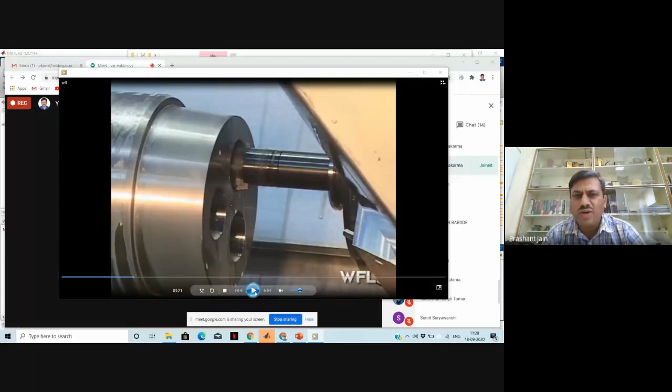Here I want to highlight this, you can see on this screen. This is the off-center drilling that has been done on the lathe machine. We all know about conventional lathe machines, we can do center drilling by mounting a drill tool on the tail stock. Sir, look at this, this is off-center drilling.

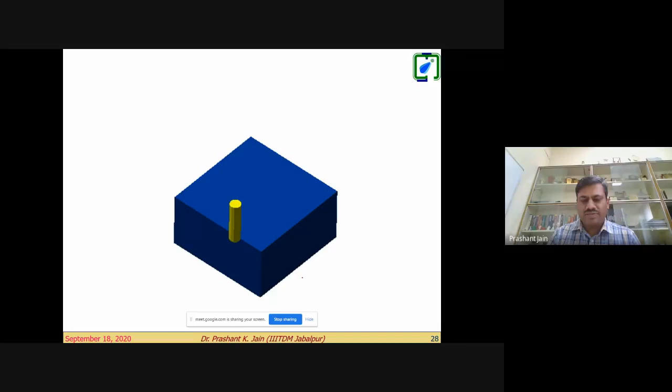What is required for us in this case is that every time we need a simulation to be run, the part programming to be done. Then look at this view. This all kind of machining requires computations. I am showing only this video, not going into much detail, because you require a lot of intersection calculations with different surfaces and different tools, and only then can you find out this kind of tool path.

Normally, what we use here for geometric modeling is UG, Unigraphics, CATIA, etc. And for machining we also have ProE, SprutCAM, Delcam, FeatureCAM, MasterCAM softwares available, which show us this simulation, and along with this simulation we can generate the G&M code program which we can directly run on our CNC machines. So look at this, how important this is.

This is 5-axis machining. Every time, what is required is that your CNC machine tool should be perpendicular to the surface which it is approaching. See it again.

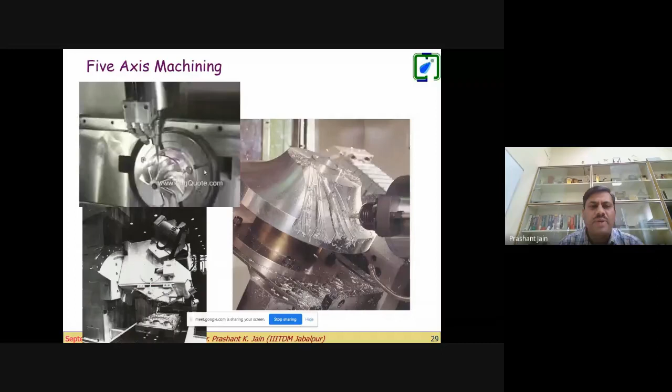See here, this is a turbine blade fabrication going on. What is required here is that the tool should make a perpendicular angle at this point every time. That's the requirement.

Now look at this. These are the rotary tables we are now using on CNC machines. So anytime we can make our machine into a 5-axis CNC machine, or we can keep our CNC machine 3-axis, with 2 additional axes given on this rotary table.

Now, if your software is not capable of synchronizing movement of these 5 axes, you need to do separate programming for these 2 axes and the remaining 3 axes with your existing CNC machine.

Look at this. One axis of rotation is here, and another axis of rotation is along this table. Look at this diagram: this table can be rotated about this center axis, and at the same time it can be rotated about this other axis. So 2 axes are made rotational. This is mounted on the horizontal machining center, so now we can have 5 axes.

Look at this again, another view. This is the Z axis, and you have the X axis movement in this direction. I hope participants have a little bit of knowledge about where the X axis lies, where the Y axis lies, and what principle we use to designate these axes, X axis, Y axis. If you want to share your views, keep typing in the chat box.

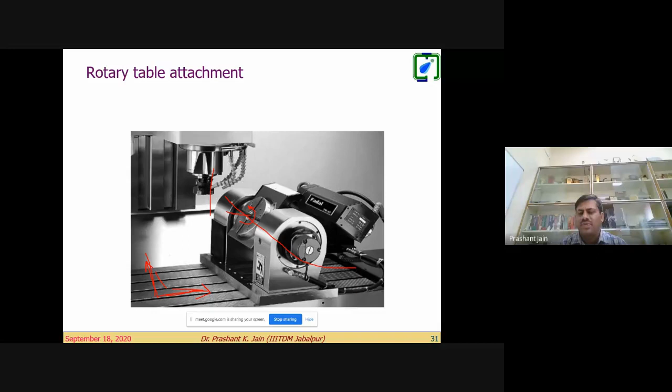Look at this, the huge NC system for large parts. Can anybody locate an operator in this picture? Drop me a message in the chat box.

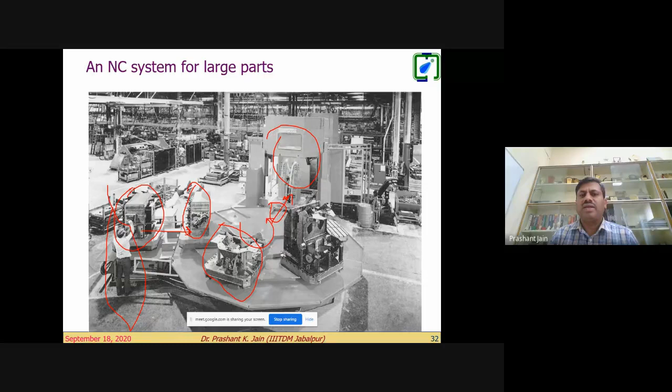You look at this, a lot of this setup is done separately on this separate pallet. Once it is done, it will be pushed onto this table. So this is known as the pallet changer in today's CNC environment.

We used to do this. Now look at this, what is the requirement over here? Can you notice that if we machine this cylindrical surface, with this machining center, every time your CNC machining tool is coming from the vertical, this is a 3-axis machining.

With this 3-axis machining, every time it will move like this in this direction, and then coming back, what will happen? It will formulate stair steps kind of thing. Everywhere you will have stair steps.

But suppose you want to have a smooth surface, what is required? Every time your tool should come normal to the surface. Look at this, in the second diagram, every time the normal has been calculated, so we can have X, Y, Z values for any point. And then, after the XYZ values, we can also have the rotation angles alpha and beta about the x-axis and y-axis.

That's why we need to calculate the surface normal. Can anybody comment on that? How to calculate normal to a surface? Any surface is given to you, how do you calculate a normal?

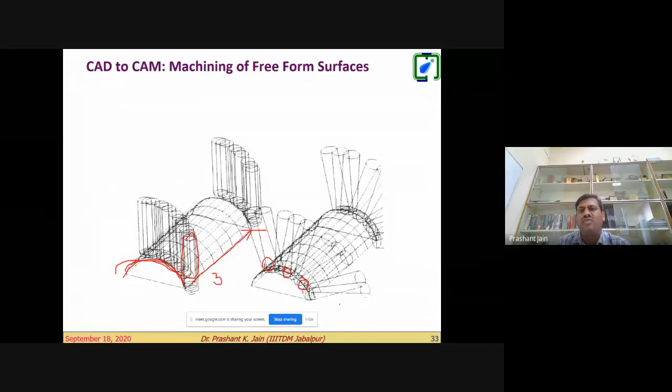So let us move to the part program. If you haven't done this, look at how our first part program will look like. Here's the question: a 2 by 2 inch square is to be milled, the diameter of the end mill cutter is 1/2 inch. Now we set this as a data point, 6 6. We know this would be 8 in the x-axis, and here it would be 8 by 8.

Okay, so look at this, how we write the program. We make this lower left corner as 6 6, and use the tool radius compensation. So our tool path would be like this. And if it is 6, we know what it should be, it should be 5.5. How do I conclude it should be 5.5? Right, I have shifted this tool path by the radius of the end mill cutter, 1/2 inch radius. So I have moved it away.

Now look at this, how we keep on writing. In the CNC machines, here the computational intelligence comes in. We can already apply the compensation, so all the movements will automatically be shifted like that.

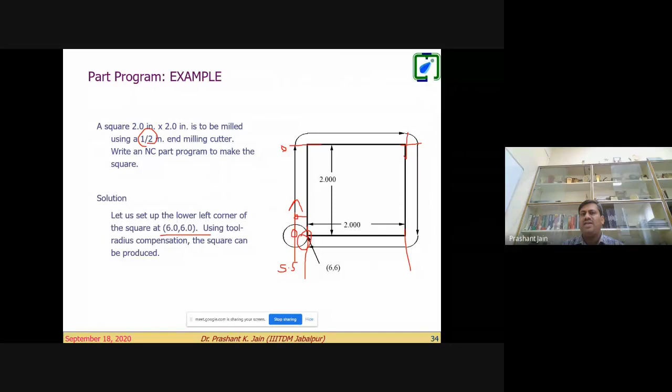And X will remain the same, so we have X8. Then you come to X8, then Y6, then Y6. So it will complete the cycle. Based on this, our part program would be completed in this manner.

Now see another part program. So what we have in the part program is step-by-step instructions in the form of numbers, letters, symbols. And when we group them into complete logical information, we call it a program. Now the CNC controller will interpret this program, then issue a series of commands to stepper motors, servo motors, or whatever other controls are there.

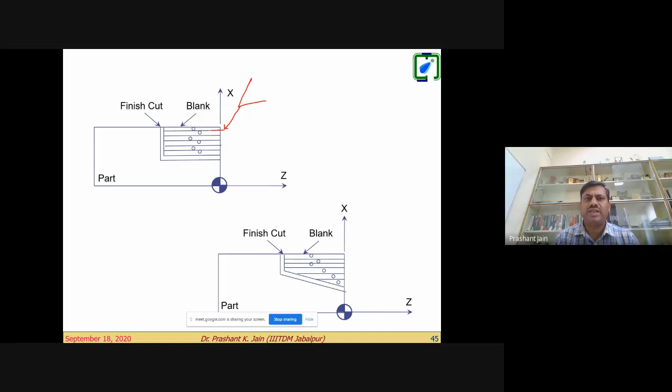Now look at this. If we have to do this kind of cutting operation, what is required? Every time your tool would be situated here, then every time your tool has to reach up to this point, then you start machining and coming back and going back. Then you go downward, then go again, take a cut like this.

So every time we need to perform this calculation by our manual calculator or whatever the best solution you can find.

Now look at this. If it is a taper cut, what is required? We may not be knowing this length, right? Similarly, here we may not be knowing this length. So either you use trigonometry based on the tapered angle to find the length, or you can use equations where you know this is a straight line, and this is another straight line parallel to the z-axis. So you can find out this intersection point, right?

So every time you find this intersection point, then take the tool back to some height and go back at the retract height, right? And then go back outside the billet and go downward like this. So if you have this kind of taper cut, you can plot several straight lines and find their intersection points like this. So your tool has to move up to this point, right?

And then, suppose I ask you to develop a CNC program and this drawing is given to you. For this drawing, what is required? You need to plan how the machining is going to take place, right?

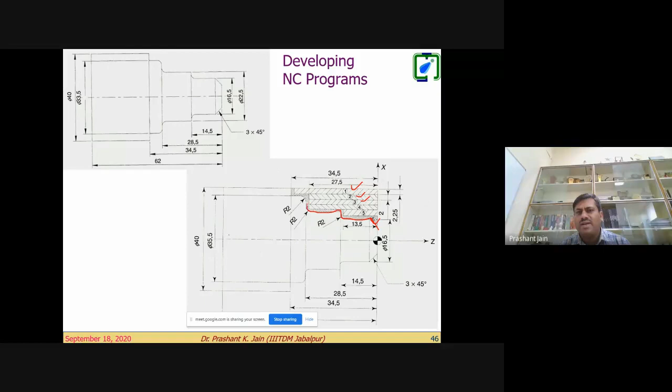So look at this. This is the first cut, second cut, third cut, fourth, fifth, and then sixth cut in a single pass, right? So this is the planning to be done for developing any CNC part program.

For any CNC part program, look at this, how we calculate. See another example, look at this, this is the first cut. So you are starting from here, then going up to this. What is the requirement? You require the coordinates of all these 4 points, which are now to be amalgamated with the G&M code to make a complete part program, right?

So for this kind of planning, you need to find the coordinates for first, second, third, fourth, fifth - all the coordinates. Now look at this, for a complete operation you need this kind of calculation. So here with circular interpolation, linear interpolation means G01, G02 and G03, depending on clockwise and anti-clockwise circular interpolation, you have to find it out. So this calculation has to be done.

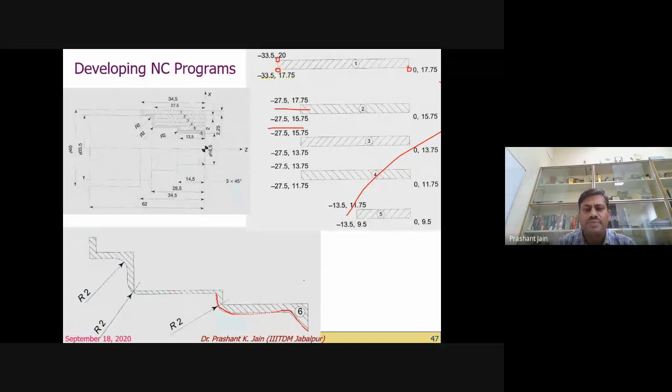Now look at this, some more typical situations where you need to calculate something more. Look at this, what is happening here? You see, this is a SolidWorks drawing, so the inside blue color part has to be cut. So what is required? Your tool has to move every time from this. Cutter diameter is given as 0.5 inch, right?

So what is required? You see the coordinate of this point is given as x4, y4, z0. Now we want P1, so the x of P1. So x of P1 would be like this - this is what we have already talked about. 4 is the coordinate already known to you, and now you are shifting to the left side, so the radius of the cutter, 0.25, has to be shifted. So you have got 3.75.

Now for y, can anybody comment how I can find it, the y of it? Anyone would like to say? You can unmute when I ask you to comment, or you can quickly drop your comment on the chat box. Anybody can find out how we can calculate the y of it. We can use geometric calculations, we can solve the equations, we can also use trigonometry.

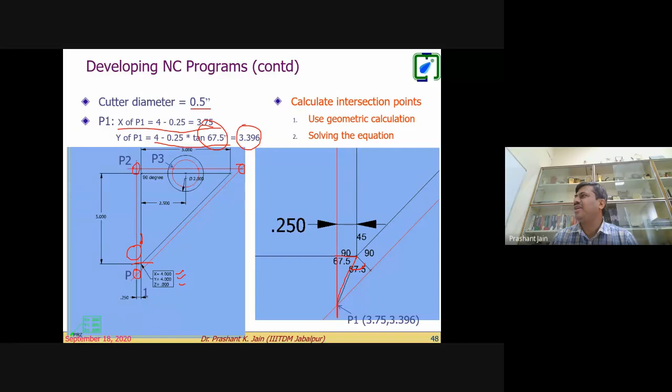No answers? Okay fine. Look at this, how we calculate this circle. This is the center of the circle for this blue color geometry. But for making this semicircle from here to here, your tool will be moving from this point up to this point, which would be the center. So you need to calculate these two intersection points again, then accordingly this tool will move up to this point. So that has to be taken care of again.

Look at this, once we calculate all these things, what is going to happen? Here you see, if you can also check in SolidWorks this kind of situation, you can click on it and get all these coordinates directly from SolidWorks.

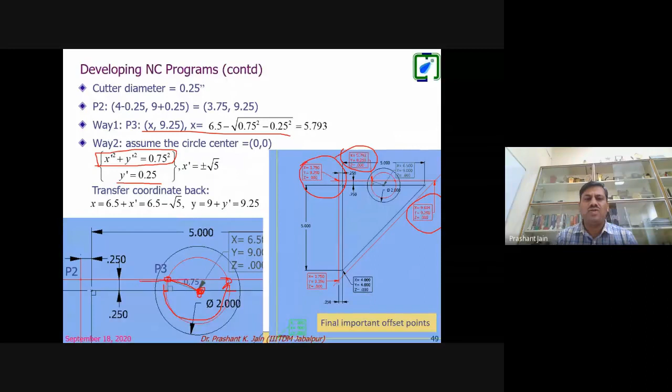If there is a circle, you want this circle equation to set the intersection. So this is the well-known circle equation. You assume this is 0,0 for movement, so the radius would be 0.75 at y equals 0. And this line, straight line y, is at 0.25. If this is 0,0, then this line is at 0.25. By intersection of this, you can find x plus minus and y plus minus.

So based on this, here is one x value, here another x, and similarly you will get two y values. These x,y values are with respect to this point assumed as 0,0. Then accordingly, you can find out and shift these values when this is your actual 0,0, in terms of this point.

Now look at this, after calculation of the center, we can write our part program. So we can start with N10, 20, 30, 40, 50 like that, and continue with this program. We can mention all the coordinates. Remember, this is P1, like this. All these coordinate values are to be completed. So this is going to happen with our part program.

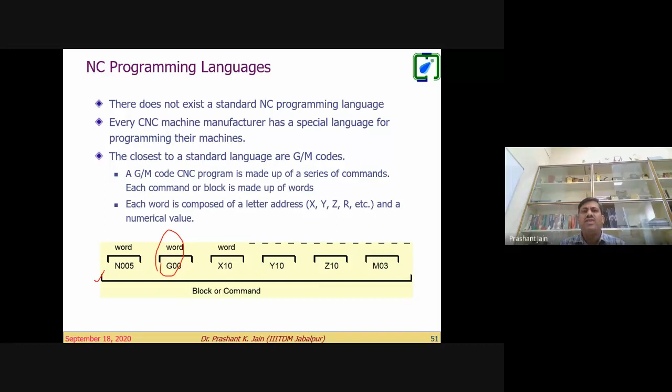My purpose of discussing all these things is to emphasize the computations required for your part program. So you should think about how we can calculate and convert this into the part program. When we start writing the part program, we start with G and M codes. We call it a block - these are the NC words, and this one block makes complete useful information for the CNC machine, which the CNC machine can execute. So these are the various G and M codes.

Coming back to the linear interpolation, you look at this: we give the end point and the start point. So this is for the linear interpolation, and accordingly you see this part program has been written - G71, G97, G94, so millimeter mode, constant RPM, feed in millimeter per minute, then go to home position, tool change, spindle RPM, coolant on, then rapid traverse to this position, X42 somewhere here, so your tool will come from this point to this point.

Okay, then look at this. Then X39, you are ready for the first cut. Now you have given the command G01 and now it will take your first cut. Then G00 Z1 going back, then again right. So it will come up to this point, going back and then go back.

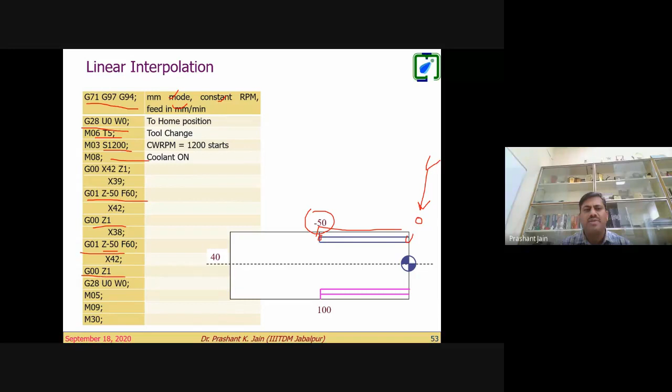So when you mention here Z minus 50, this is the Z minus 50 value. This is how we write the program, and once it is completed, we ask the tool to go back to the home position. Then write spindle off, coolant off, program stop and rewind. So this is the first program with the linear interpolation. Similarly, we can go for the circular interpolation.

Now, what is happening here? Suppose in this case, let us see. What has happened? We have taken one cut, two cuts. Assuming that this is an aluminum material, I could have taken a 2 millimeter cut, right? But suppose instead I have been given MS, so instead of 2 millimeter, I may require 0.2 millimeter. But suppose SS is given, then again the depth of cut would be more or less. Then suppose I am working on tungsten or some other material or titanium, then the depth of cut may be very, very less. What will happen?

For one cut, I need to write a block of 4 lines. For one complete cut, I need a block of 4 lines. So my tool will go down, take a cut, and then come back, and then reach back to position. So I need to write 4 lines of a G and M code program for one cut. When it was 2 millimeter, it was quite simple. I have written it, right?

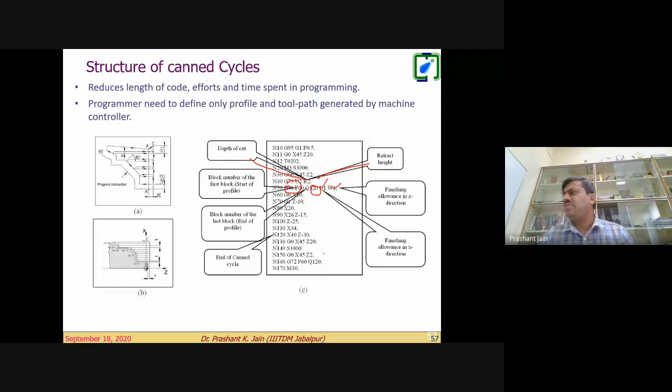Look at this a little bit with more clarity. We can assign here the depth of cut. I will again talk on the structure again. So we can say depth of cut, we can say the retract height, we can say the starting block number, we can say the end block number. We can say the finishing allowance in X direction, finishing allowance in Z direction. Then we can have the end of canned cycle. We can also define the finishing cycle. So based on this, we define the canned cycle.

Now look at this, how the canned cycle will work. There are different canned cycles. Mostly we commonly use 3, particularly for turning. I'm not talking about drilling. N number of canned cycles are available, and those canned cycles vary from machine to machine. Now look at this.

You see these red points, right? Red points to be added, and blue color dot is the intersection point. So based on this, you see the first cut is done. Second cut, tool back. Third cut, this is third cut. Now tool back. Fourth cut, now tool back. Fifth cut, now tool back, like this.

Now look at this, what is going to happen in this situation, because tool is back from here. There would be a steps kind of thing. This is going to happen, right? So here there would be steps. So in final cut, it will go like that, the profile. So these steps would be removed.

Now you see again, there is a gap. What is this? This material is left for the finishing part. So once this is done, you see final cut will take place so that it can finish, right?

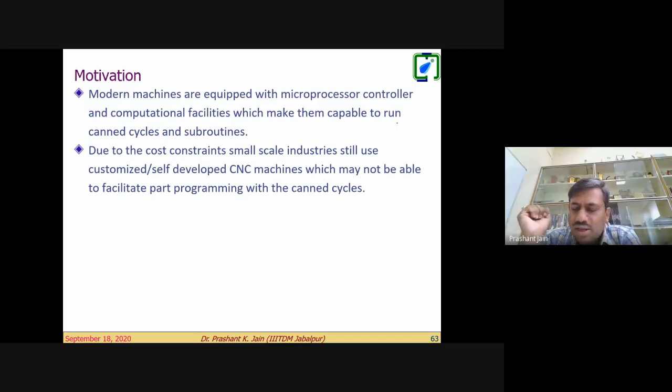So here I would like to specify that when I talked about the simplified program, I mean that you have the program with only linear interpolation, right? And the canned cycle program will define your geometry, your profile of the machining surface, and the length of the program will be very, very less, right? But your machine should be capable to calculate those profiles, right?

So canned cycle facility would be available, right? What I am presenting here, for a low cost machine, we don't have this facility, right? So what we did here, we made a utility, right? Which software utility will convert this canned cycle part program into a simplified part program and remove the canned cycle.

So when I write a part program for a CNC machine which does not have the canned cycle facility, right? So I will write a program for a high-end machine. My program length may be 10-20 lines, and I will run it on my software utility, which will convert this program into a simplified program, which may have more than 1,000 lines or 2,000 lines, right? So that is the thing we developed in this.

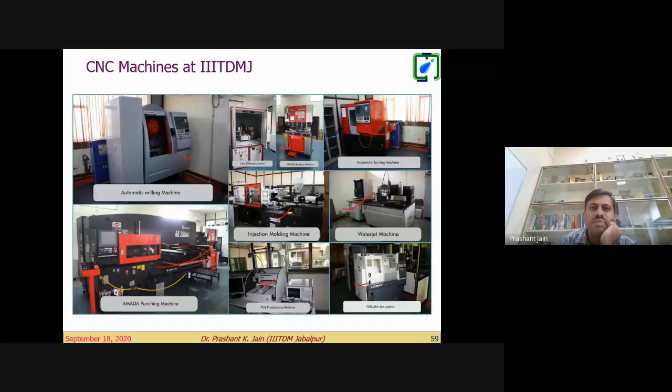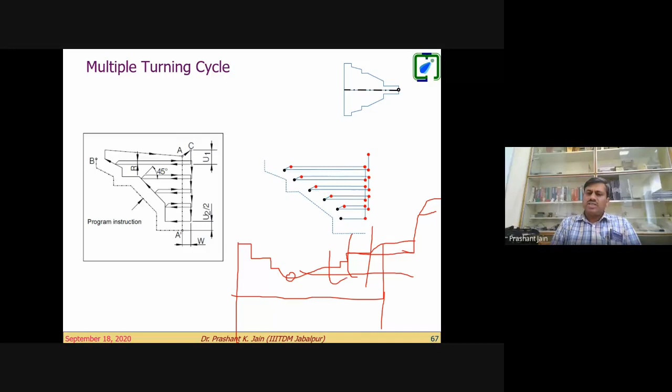Even if I take from the facing to reach up to this point, what will happen? This will remove this portion. So in this situation, we will have a pattern repeating cycle where the tool is always moving parallel to the geometry of the workpiece.

Look at this, this is the geometry. So the tool will move like this. First cut, look at this, second cut, third cut. So in this way, the machining would take place, but it is time consuming because every time it has to trace the profile.

And even in the first cut, what is going to happen? The material would be like this. Look at this, in the first cut, this much material is only removed, the remaining portion is idle. Second time, this much portion is removed, the tool will idle. So there are advantages and disadvantages of all three canned cycles, but they are defined for the convenience of the user.

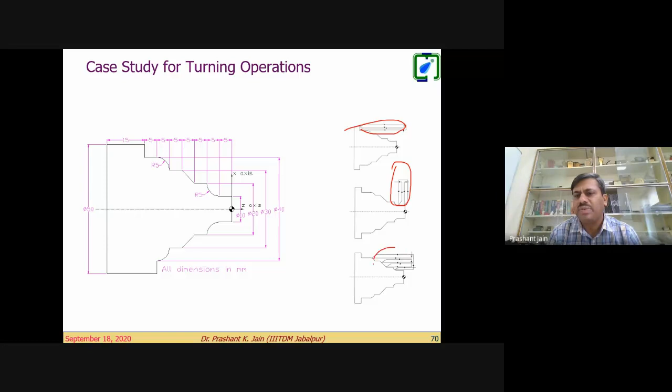Now look at this, what we have done in this case. Suppose this workpiece is to be machined. So we have taken here the turning cycle, we have taken here the facing cycle, we have taken here the multiple turning cycle. Look at this.

These are the two machines. You see, this is the Concept Turn 250 EMCO machine. What is happening? This machine can run the canned cycle, so I can write a very simple program. This is an Envirotech made very small CNC machine. This machine does not have the capability to have the canned cycle.

Look at this. When I wrote a program for this machine, the lines are total 31 lines of the program. This program I loaded to my software utility and converted this into the simplified part program, meaning without the canned cycle. So I have deleted some lines in between. You see the lines are 140, and this is the simulation on the EMCO machine. Envirotech machine does not have any facility for simulation.

So I hope you got what is the advantage into that. I wrote a program of 31 lines, which is automatically converted by the developed utility to 140 lines, and which can be run on different machines. Now look at this next.

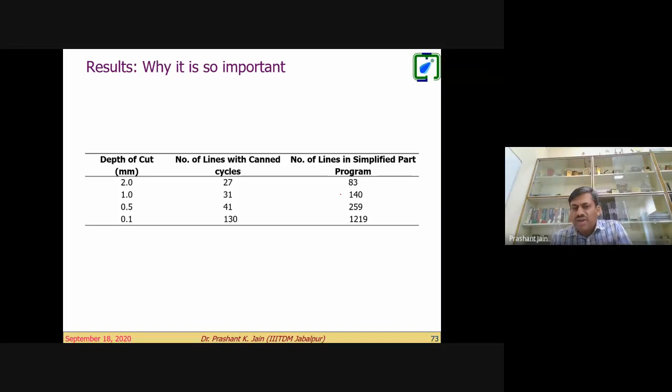But when it is converted into the simplified program, the total number of lines are 1200. See the advantage. As a user, I would be writing only 130 lines, and this machine would be able to perform the canned cycle just like this machine. The huge difference in cost of both the machines, that's the advantage we get in this process.

Then let me show you another case study. Before that, let me run a video. Let me try so that you can understand in a better way. Let me see which movie I have tried. Yeah, just look at this video.

Can you see the video? Yeah, can you see that? Yes, sir, we can see the video.

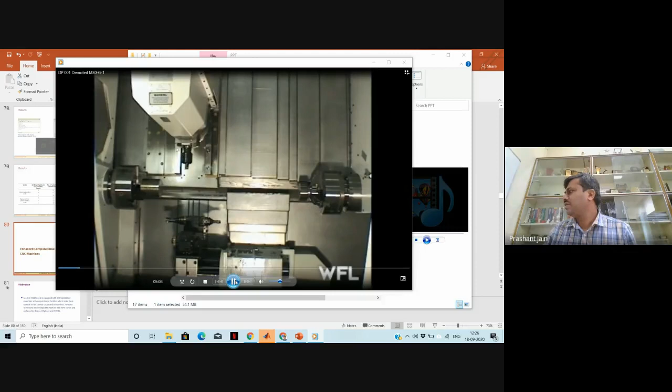Let me run from another window as well, from another system. I hope we will try to show you the sound. Can you listen to the sound as well?

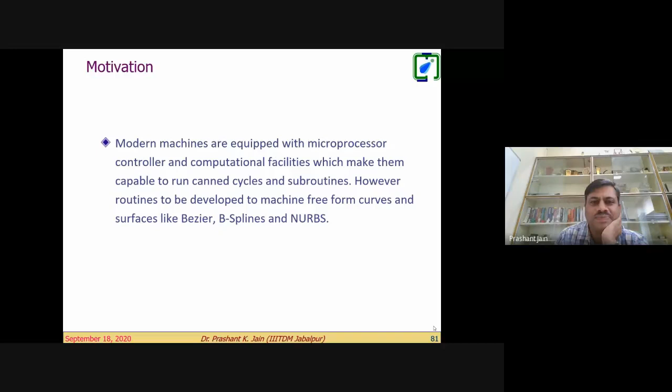So now let us talk about the Bezier surface, right? In this case, what has happened? Even whatever machines we are discussing or video we have seen so far, they are also not capable of running the canned cycle for these kinds of things, right?

Somebody mentioned in the chat box about contour machining, right? So in contour machining as well, what is required? We normally convert all the contours into small linear segments, right? If you talk about the CNC machine, they have linear interpolation and circular interpolation. If you want to have an ellipse, parabola, or hyperbola, they don't have any facility directly.

What actually they do: you can take an ellipse, hyperbola, or in this case Bezier curves, B-spline curves, non-uniform rational B-splines. They get cut into small portions of small linear segments.

Okay, so like this, suppose this is a Bezier curve. I'm not going into details of the Bezier curve - you can Google it, or some other time if we find an opportunity we will certainly discuss. This is a synthetic curve, need not go through all the data points, and it's a very intuitive curve, right? So it has a lot of properties.

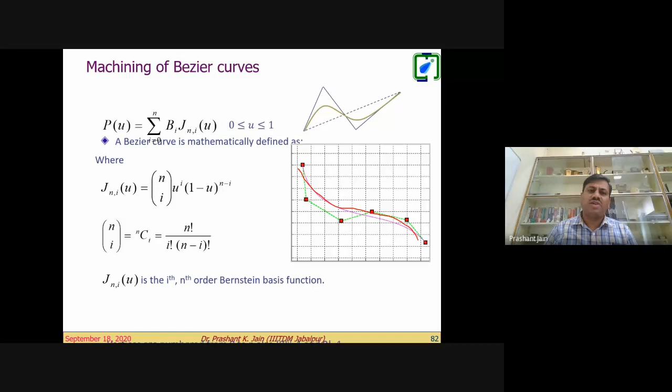And suppose this type of curve or surface is to be generated at CNC machines, a lot of calculations are involved, right? I'm not going into the details of the calculation.

Only thing: suppose this is the curve, and for the turning cycle I have these horizontal lines. For the facing cycle, we have the vertical lines. We can calculate these intersections, right? Once we calculate these intersections, we can convert this into the part code, right?

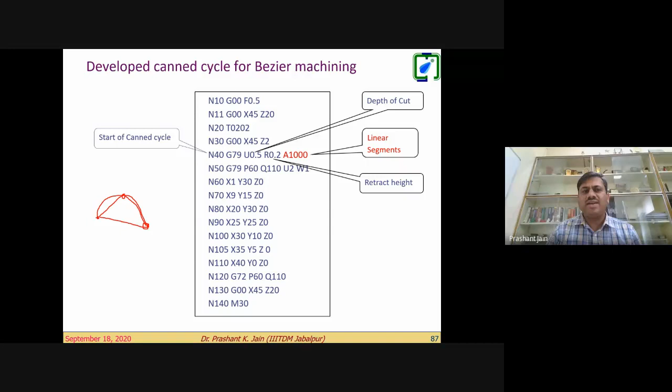So what does it mean? Suppose I have this Bezier curve, right? And if I say 1, it means my CNC machine will start to move from here. When I say 2, then the machine will go to this point and then come back, right? When I say 4, then the machine will go like this, right?

So for this calculation, when I say 10 segments, that's a coarse division. When I take 1000, it will be more close to the actual curve. So depending on the requirement, we are capable to do this, right?

Then you have the block number, the start of the geometry, end of the geometry, then finishing allowance in both directions. Then you have the end canned cycle and also the finishing cycle. So the remaining part is the same like a canned cycle. Only thing, this canned cycle will calculate the points for the Bezier surface machining, right?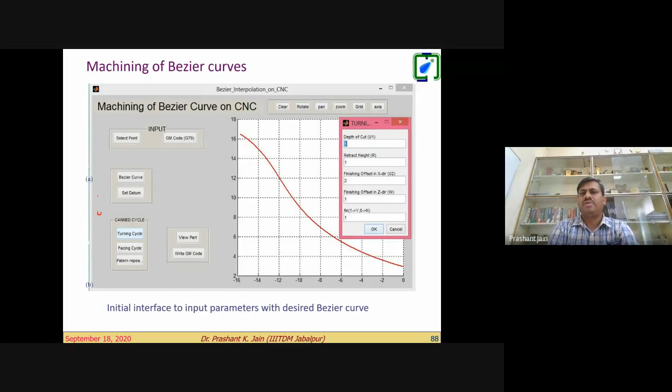So look at this, we have developed this utility in MATLAB, and in this case we can draw a Bezier curve in the MATLAB screen itself, just like other professional softwares. We can simulate it, and once we simulate it, we can see the part simulation as well. And apart from this, we can write a part program which can directly be uploaded on the CNC machine, right?

This also has some computational intelligence. If such kind of cusp is generated, it will tell the user, okay, there is a cusp. This cannot be done by the single turning or facing cycle, right? So here I would like to end, but before that I would like to show you that MATLAB program as well, how it has been implemented, right?

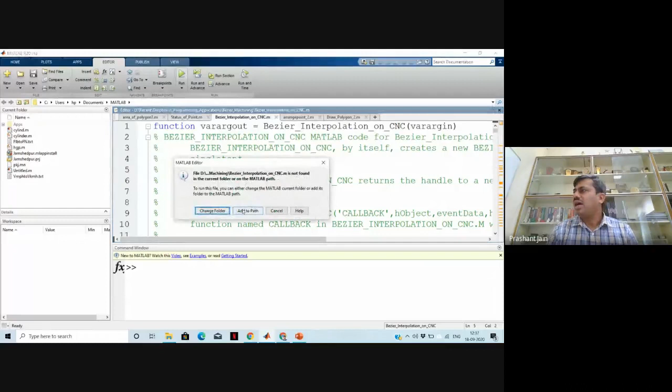You see, I'm running this MATLAB code. How many of you are aware about the MATLAB programming? Yeah, please type on the chat box.

In the meantime, just see this utility. I can select these points. You see, I'm running the MATLAB code on my screen, right? Then I will draw a Bezier curve. So see, this is the Bezier curve, right? Then I set the datum. Now see, this point has reached the 0,0 location. So all the transformation has been done.

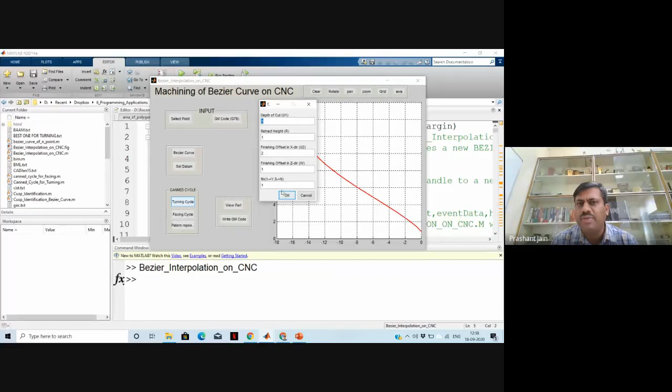Then let me run the turning cycle. So I'm running a turning cycle, right? So I set the depth of cut 1, retract height 1, finishing offset 2, finishing offset for Z direction, and total finishing allowance for both, right? So here, if I need to allow the finishing allowance to run this machining, I set 1. I'm not changing any parameter, but you look at this, this is a professionally developed utility. So within a dialog box from the window, another dialog box appears to select the parameter, right?

See the simulation. Right now, not only this, you can see the part. We have created some more buttons as well. You can rotate and you can see this part of the CNC machining, how this part will look like, right?

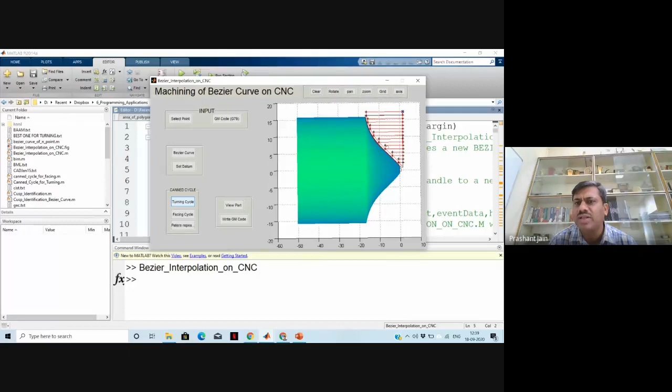Look at this curvature, right? Can you see this curvature? What is going to happen here? Let me zoom it. Can you see that this is not your circular interpolation simply, right? So that is going to happen, right?

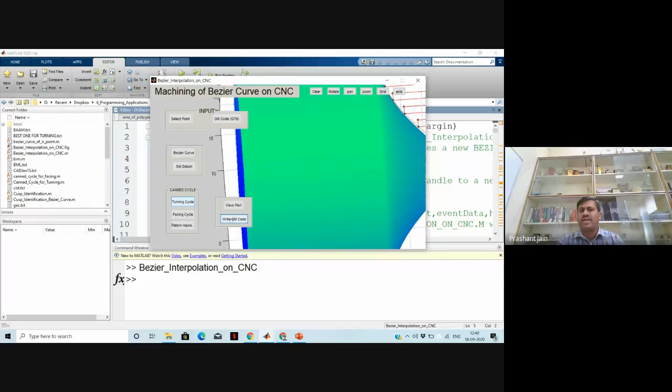Okay, now not only this, what else we can do here? We can create the G&M code program. So if I write the G&M code program at this stage, look at this. It is just like a professional software asking me to select the file name, right?

So if I have a file name like that, say, let me say Truba, right? You can see here the working directory. The file would be created here in the working directory. Let me put Truba. And let us check in the working directory. Yeah, you see, this is the new file created. Let me open it outside the MATLAB.

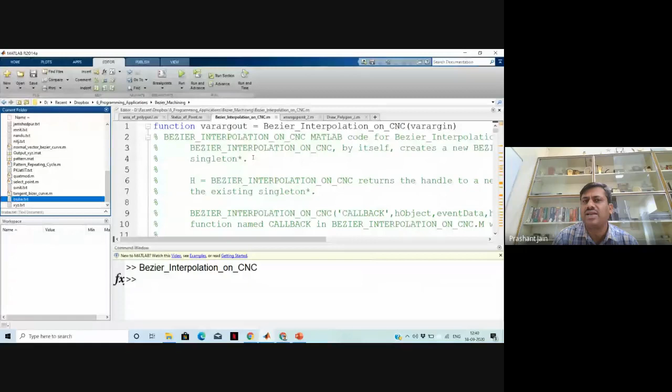This is the advantage, right? And you see how simplified it is. If you look at it, these so many lines of program, right? What I did simply, I selected a few points. Let me run again so that you can see. Yeah, look at this, I'm just simply picking a few points, right? Bezier curve, right? Datum, turning cycle, accept the default parameters, and the simulation you can see.

Right, now look at this. You can see the view part. This would be the shape, right? No circular interpolation, nothing like that, right?

You understand? Those who are working on CNC machines are learning CNC machine. You see, I write the program, right? Previously, we have written the Truba.

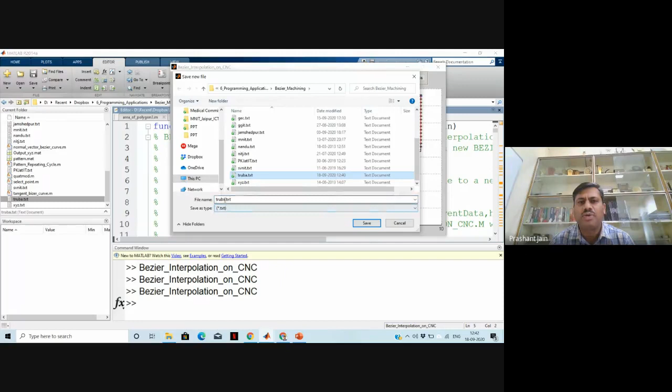So let me make changes. Let me put it Truba 1. Okay, save. Look at this in the working directory. Not yet. Yeah, Truba 1. New program has come. Look at this.

See this, for this case, this is the program, right? So that's the situation. All these new coordinates have been calculated, converted into the G&M program.

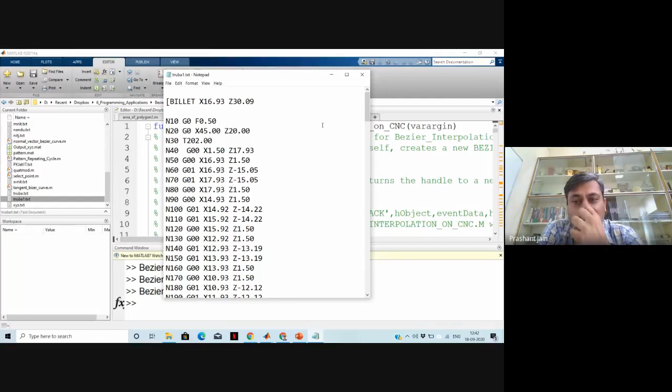I can copy this program, and this we have synchronized and more calibrated with our Okuma CNC milling machine. So I can load this program directly to my CNC Okuma milling machine, right?

So that's the way how we can take up some projects. As engineers, I don't think this is our only task, that we can make some good components on a CNC machine. I can show you a lot of components behind my chair made on CNC machines, but that is not our purpose. Here, as engineers, we have to think about how we can enhance the capability and be part of the CNC machine development or improvement, or the new technologies to come for CNC machines. So this is the MATLAB.